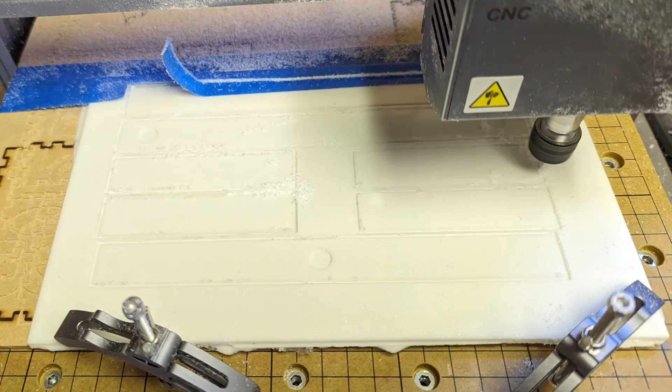It does 3D printing, laser engraving, and CNC. Some of you might be familiar with a 3-axis CNC machine, one that moves more like a 3D printer, where you've got your left, right, front, back, up, down kind of axes. The fourth axis just adds a rotational element to it, so you can use subtractive manufacturing to make asymmetrical pieces, which you would otherwise not be able to do.

Now, a 4-axis CNC does still have some limitations. Speaking of limitations, there's kind of a thought - or at least there was a thought in my mind when I was younger - that limitations are a bad thing. And I've come to realize that no, they're not. Limitations are really kind of guide rails, guidelines that help your creativity flow.

So if someone were to come up to you with a project and say, 'I want you to make whatever you want,' then you kind of just sit there, scratch your head, and go, 'well, that's not very helpful.' But then if someone were to come to you with a project and say, 'I need you to make a box out of wood, and I need it done in 2 weeks, and your budget is $300,' then you have a much clearer path forward.

You can work within those limitations, and you've heard the saying that necessity is the mother of invention. That really shines when you limit yourself, or you're limited by external constraints - something a client puts on you, or something your budget or timeline puts on you. So limitations for this project are going to be time, of course, because that's not infinite.

Now hold up, that's not a computer. Yeah, you got me there.

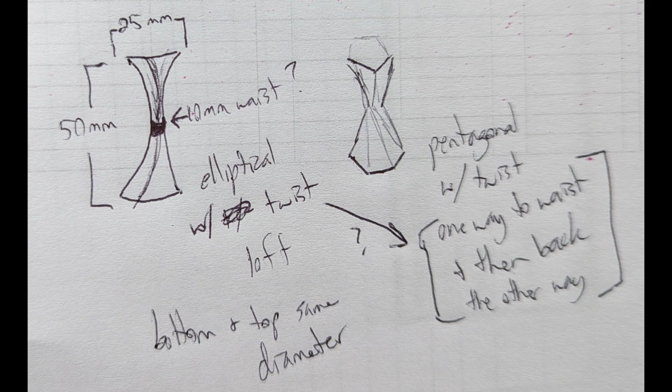All your designs should start in your head first, kind of roll them around for a while, see how you like it. And then you should sketch it out. You can waste a whole lot of time on some kind of CAD program if you don't have at least a basic sketch to go off of first.

Okay, so I'm going to breeze through this stuff here. If you guys would like for me to do a more in-depth YouTube on my process here, then I certainly can dive into that in a future video. But basically, I'm just taking those sketches that I had and realizing them in the software.

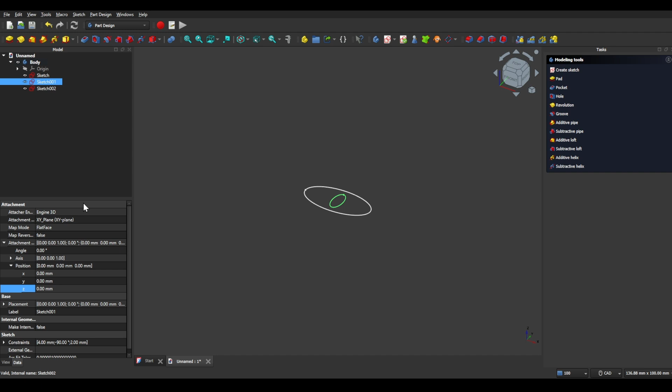This is FreeCAD. It's a free to use, open source piece of CAD software. The name kind of says it all, but just in case you were doubting that, it's a parametric modeling program, which means you're using parameters to define your shapes. This lends it to more geometric shapes - organic shapes are a little bit harder to realize in this type of program.

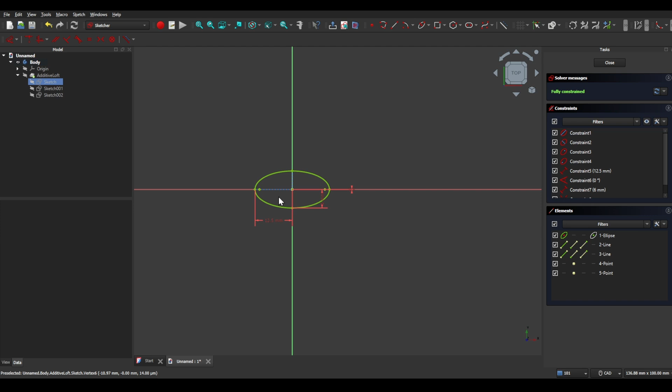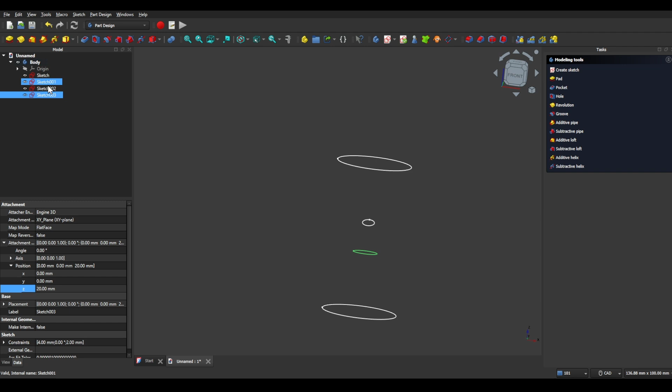If you want something more organic, I would recommend a program like Blender, especially one where you can use the clay tools, where you can basically just take a blob and mold it to your heart's content. So I'm layering sketches on top of one another, and then positioning them along the z-axis to add some height for this. And then I'm offsetting those to provide the twist.

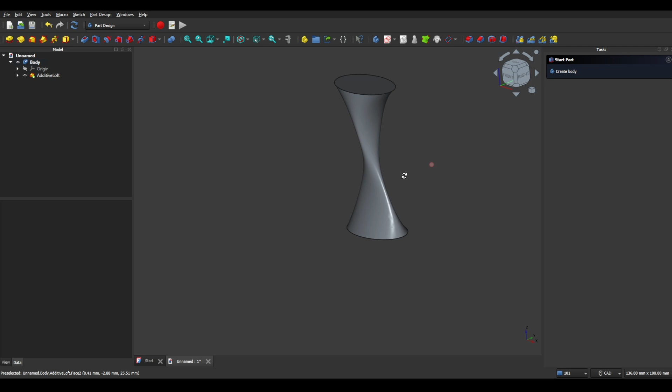You may notice as you get to the end of this video that the capstones that I actually produce are not quite this shape, and that's because when I processed the darker wood, the cocobolo, I ended up not having as much material as I had anticipated, and so I sized these down, but not proportionally. So the capstones that were actually produced are a little more squat than these.

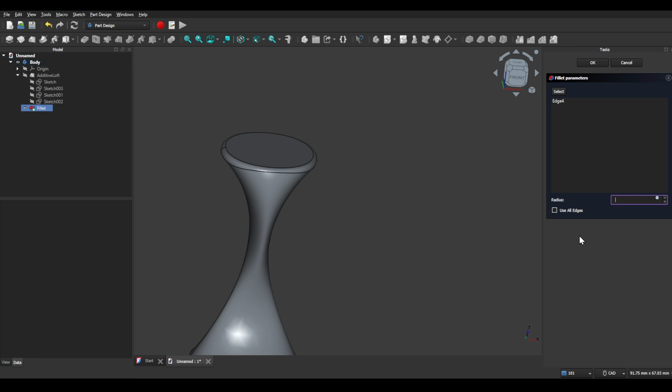Once I get a shape that I like, let's add some filleting details, things like that to it. For the second one, I wanted to keep the general shape of the first one, but instead of doing a curved, smooth design, I wanted something angled.

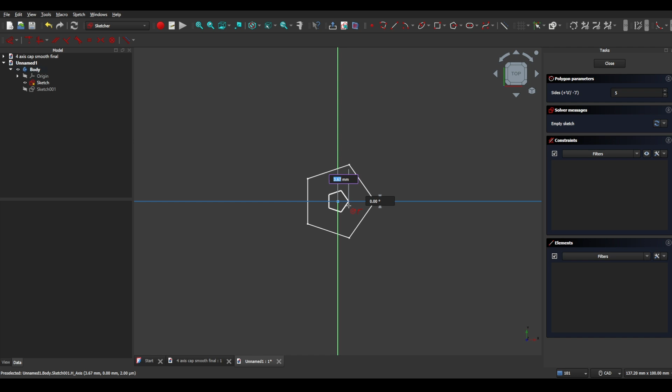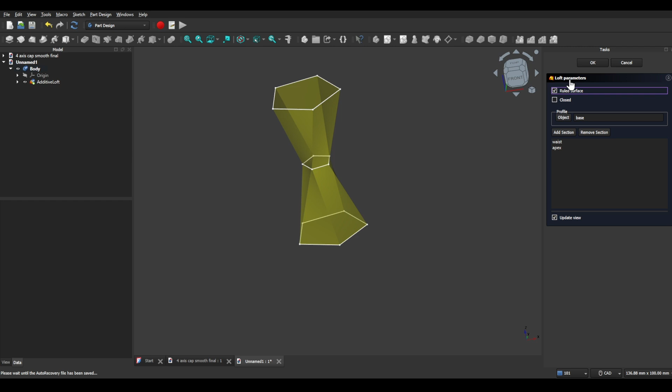This is something that would be very difficult to do on a traditional lathe. You could probably do it with a bandsaw or a circular saw, but it would take quite a bit of fiddling around, or you'd have to make jigs to make this. Using the fourth axis on the CNC allows me to do something like this, which would be hard to produce with other methods. Once I'm happy with the general shape, I'm again going to clean up some edges, add some fillets, things like that. Rotate it around, trying to imagine how it would play, how it would feel in the hand.

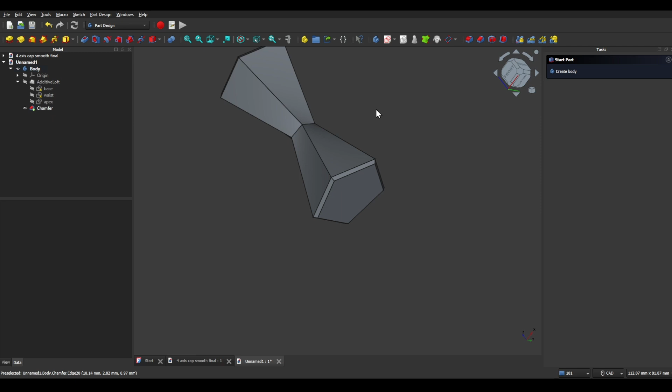Once I'm satisfied, we'll move on to the next stage, which is taking this STL and putting it into the software, Luban in this case, which is what my Snapmaker runs on, to produce a G-code so we can mill this out.

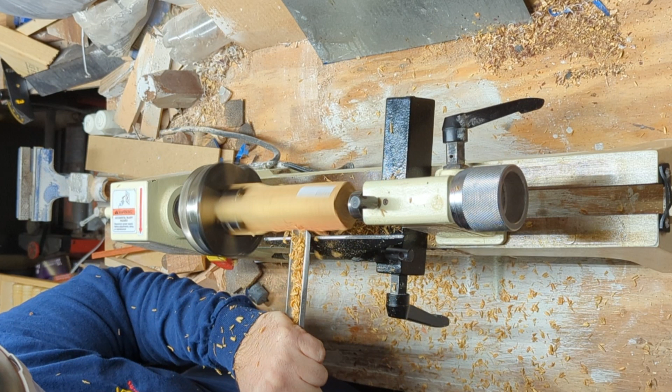Again, with the bait and switch, that is not a fourth axis. You're right, I started on the lathe to remove some of the bulk of the material. That way it would cut down tremendously on the time on the fourth axis of the CNC. Just because you have a piece of technology does not mean that it is the right fit for everything.

Let me show you the time comparison between removing this extra material and not. As you can see, by spending a little time at the lathe, I've saved myself 7 hours of machine time. And now, back to the show.

Being at the lathe is a very zen-like process for me. I've used a lot of power tools in my time, and for some reason this one just takes me to a different place. If you've never turned any wood before, I highly recommend it. I can put my hearing protection on and my face shield and just zone out for a while and watch the wood take shape in front of me.

I'm checking every once in a while to make sure that I don't take off too much material, trying to get the diameter of the wood down to about 1 or 2 millimeters more than the largest part of my final shape.

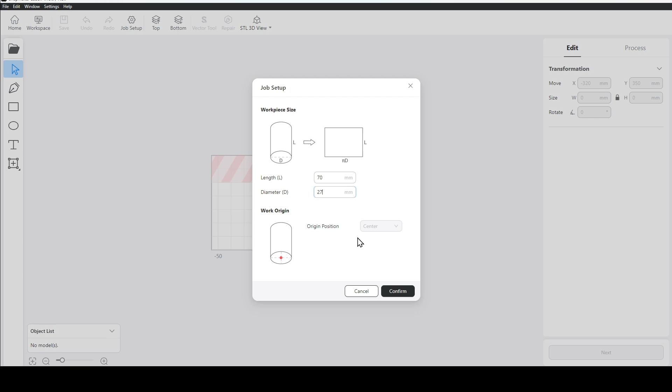And here we'll bring the project into Luban. I'm putting in the dimensions of my turned wood and then bringing in that STL. You'll notice it's going to come in as a grayscale image, and that's just how Luban processes these STLs, these 3D shapes.

It does the same thing for a relief carving on the 3-axis CNC. So if you look at this, these white lines here are going to be the most shallow of the cuts, and then as it gets darker, it cuts deeper.

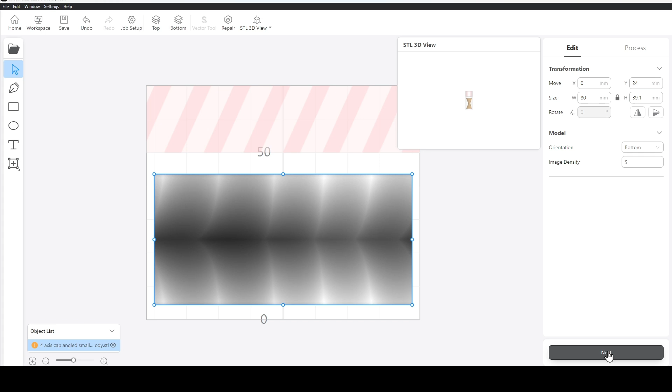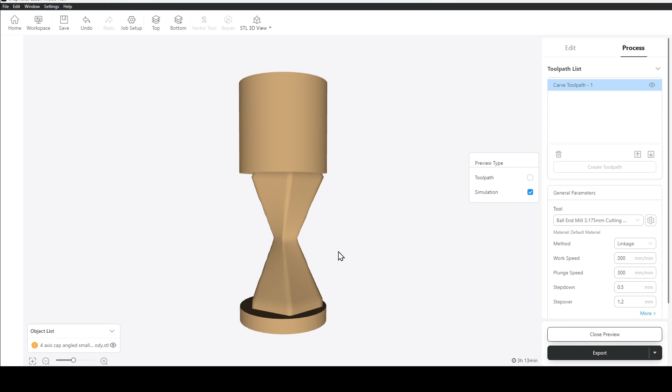Setting my parameters of the toolpath, I'm going to go with a larger kind of ball end mill. This one's about 3 mil, which for Americans is about 1/8 of an inch. It's going to leave a rough surface, but I do plan on doing some hand finishing of this, so I'm okay with the rougher surface off the machine, especially because it will lead to a faster cut. And I do have, if you'll remember, a deadline of about a week on this.

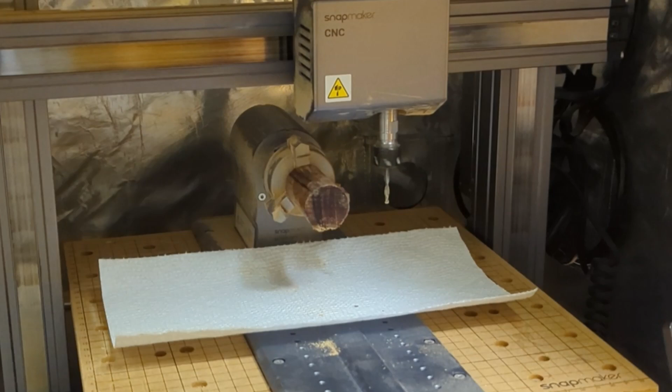Some calibration, and then we will be ready to cut.

I've not really put this tool through its paces. I need to take some time and do some more intricate carving on it, some further learning of the software and the capabilities of it, because it really is very nice to have this ability to carve something that's not symmetrical.

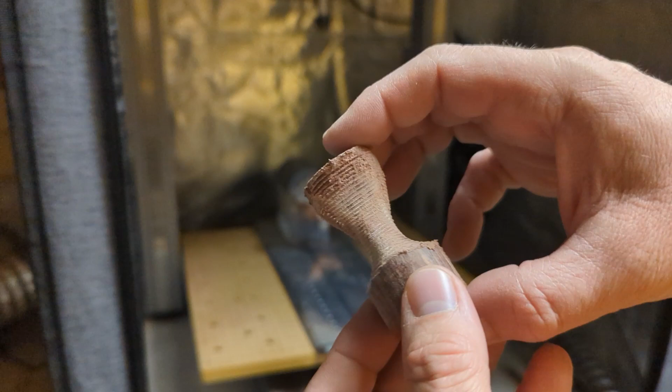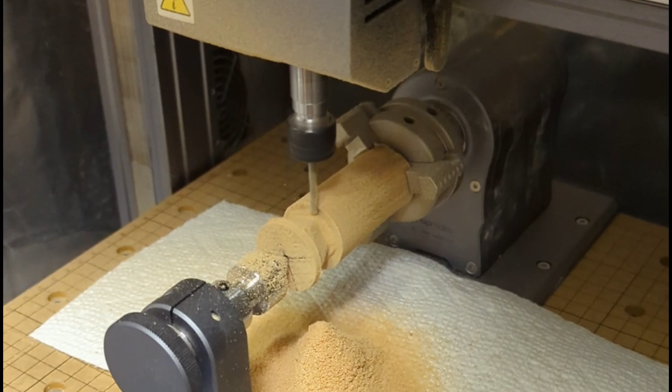Clean up, take that piece off. And here you can see the rough edges that I was talking about. If you pause the video here, you'll even notice something very interesting about the cocobolo wood. When you first cut into it, it has these wonderful streaks of purple and orange in it.

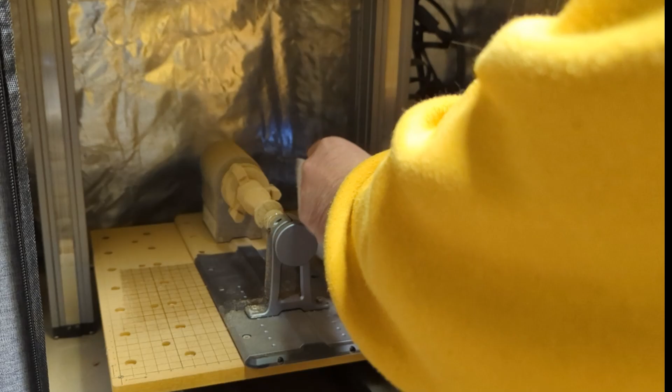Unless you are the one cutting the wood, you will probably never get to see that. It oxidizes very quickly into various shades of brown, but right when it's on the lathe or when you cut into those fibers, you get this glimpse at kind of what the wet wood would look like.

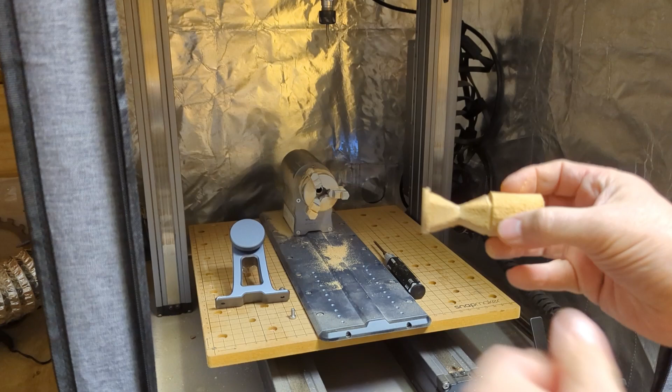Here's the second piece coming off. Again, those rough edges will finish up here in a little bit.

Moving over to the hand finishing, I'm going to use the Dremel to take off the bulk of the tool marks, and then I'm going to switch over to some hand sanding, going through some grits. I think I did 180, 220, and 400.

Went through all those, and then we will spray on some lacquer finish. Multiple coats, multiple coats, multiple coats, to get the gloss and the depth that I'm looking for in that finish. And then we are done.